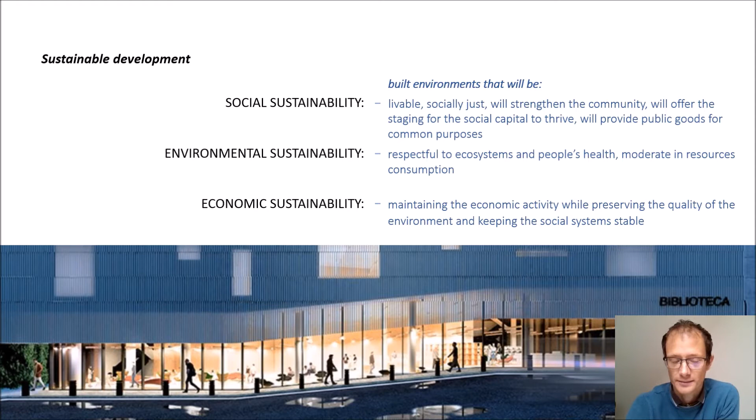What does sustainable development mean in more concrete terms in the field of architecture and urban planning? At the level of architecture, lots of very concrete standards have been developed so far that try to adjust this theoretical model of sustainable development to concrete buildings. And this relates to very different topics, which are illustrated here by showing one of these standards, which is called the LEED standard.

The LEED standard actually strives for green building design, construction, operations, and performance. So it's not only related to the final result in terms of the building in its physical appearance, but also in its functioning, so how it will use the resources and how it will perform for the users, which are more intangible dimensions, but very important to achieve green buildings in the end.

As we can see here, many different aspects are important, starting with the location. How do we choose the location for the concrete building or architecture? Because this will also have very strong environmental consequences. One of them is the transportation and the energy consumption and the environmental pollution related to it. So this is, let's say, the first criterion used by this standard.

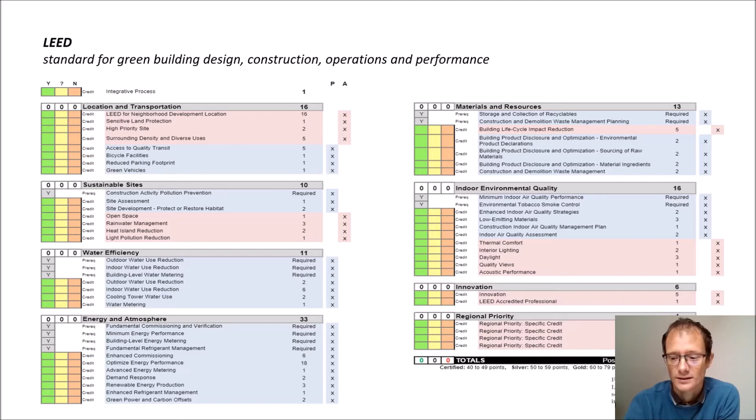Those who know Ljubljana will know that Ljubljana is a radiocentric city, so it has a very distinctively positioned city center. And then from the city center or to the city center, the main access roads run from different directions. And then along these different access roads, you would have, in theory at least, higher densities, so the morphological patterns are denser, while towards the hinterlands of these main access roads, the density would somehow decrease.

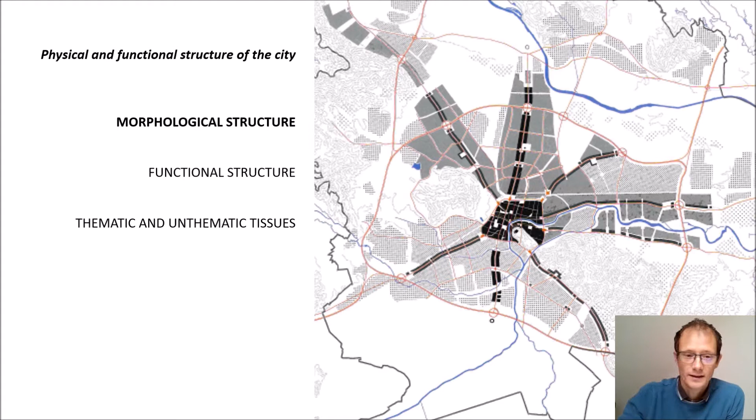What's very important within this morphological structure, of course, is not only the morphological tissue, but also the connections that would be connecting different parts of the city. And at the same time, it's not just the function of connecting, they also serve as the main network of perceiving the city. Why is this important within the discussion we will have later on? Because along these main access roads and the main connectors within the morphological structure, usually also the main public buildings would be positioned. However, the physical or the morphological structure is not the only important aspect to be taken into account when we are trying to understand the role of the positioning of the public institutions within the city territory.

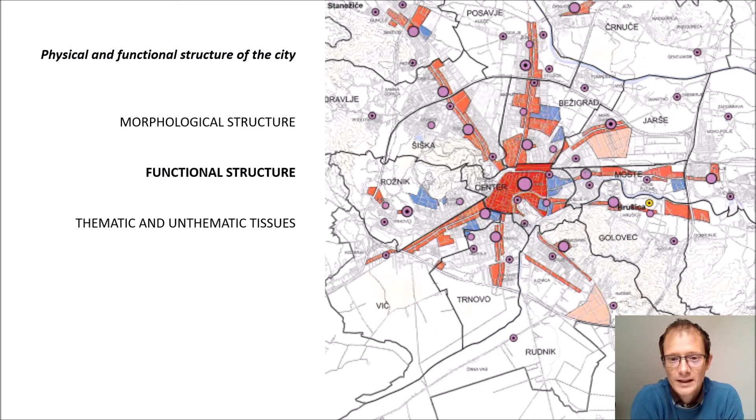These are the so-called local centers on the example of Ljubljana. As we can see, they are of different levels. Some of them are more important, some of them are less important. But it's important to note that they are kind of the centers of the activities in different parts of the city. And again, these are also the places where we would usually place the public buildings of the type of the public libraries as well.

While the unthematic tissues are the tissues that are standing out. So they are kind of out of the box, so to say. They are very unique in their appearance, but also in their functions. And again, it's very important how we actually distribute these thematic and unthematic tissues around the city.

Some of them, of course, are predefined by the historical development of the city, while the new ones are newly constructed by the urban planning procedures. And by saying this, it's also important to understand that, for example, when we are trying to find the appropriate place for the new local library, besides taking into account the morphological structure of the city and the functional structure of the city, it's also very important to understand the unthematic level of the city. Because the public library, by its prominence in the appearance and also the function, is by definition part of the unthematic tissue of the city.

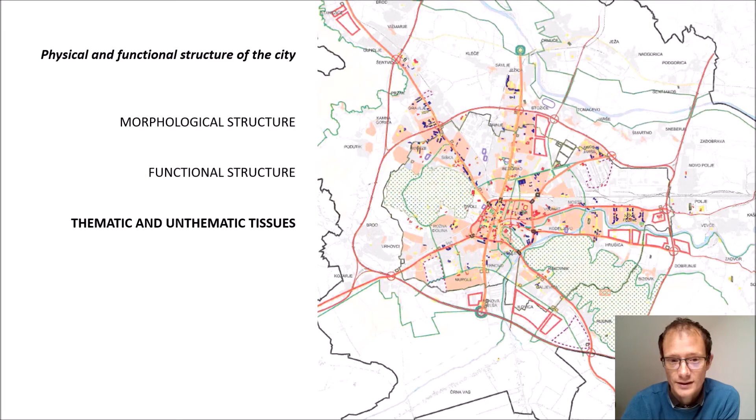So this was some very basic background in terms of the architectural and urban planning issues that we are trying to address within the urban planning. And now we come to the core topic. I'm running a bit late with my timing, but I will keep it short from here on.

Then there is a very important environmental dimension. For example, when we are trying to refurbish or build a new public library, it's very important to promote these nature-based solutions for the design of the buildings, because this is how we are also teaching the users of the city how the future of the city should be designed and how the architecture should be done to be less environmentally problematic. The public libraries are also the promotions of the technological advancements.

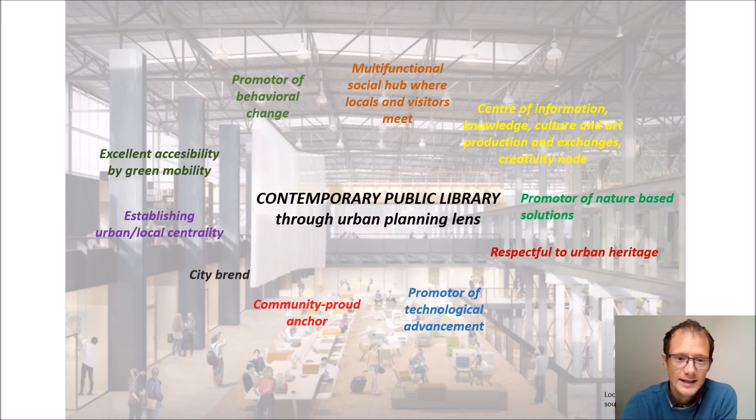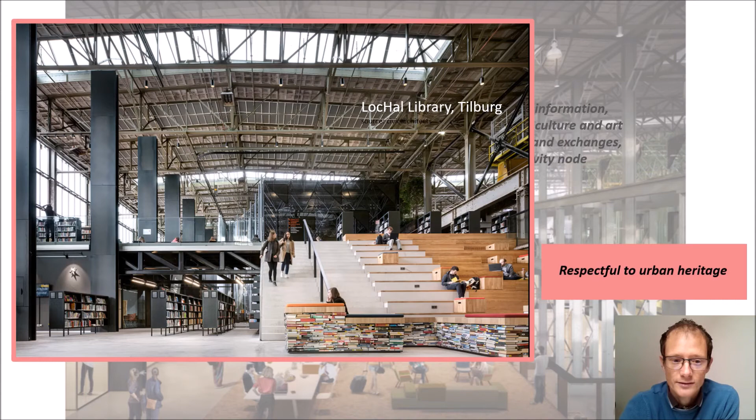Let's now really fly across some examples around the world. This is just the topic that I was mentioning. A good example from Tilburg, where they have established a combined local library, but also the local community center in one of the ex-industrial buildings. And this has become a very important local hub, even more so because it's very well related and integrated into the city's transportation network. A very good example to see if you will have the opportunity.

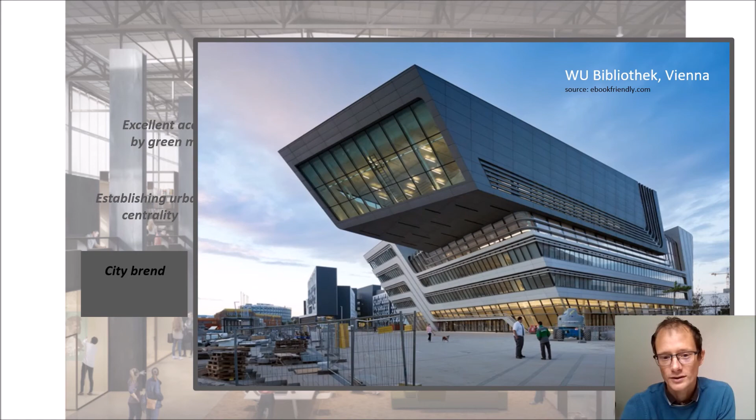And the wise cities take this advantage into account and really design public buildings, also public libraries, in a distinctive way, and then use it as part of the city branding, which is very important to boost the economic activity of the city. As I already mentioned, the public buildings, including the public libraries, are a very good anchor or starting point to make people change their behaviors.

Nowadays, I think we cannot think of public building accessibility anymore by private motorized traffic, which is still the case in Slovenia, unfortunately. But we really have to kind of softly force the users to come there by green mobility.

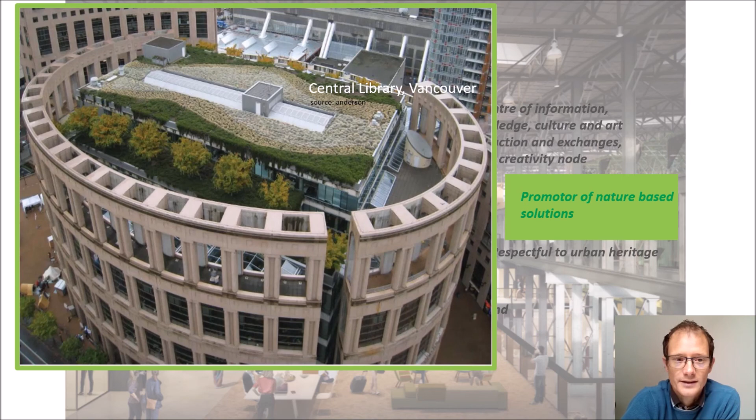Another example of this case from Vancouver, with the central library in the city. And as you can see, even if the library is positioned quite centrally and there is not much space to do something around the library, they tried to use the roof as a kind of nature-based solutions laboratory, and they're trying to really promote this green dimension to the architecture.

Last but not least, the public institutions and also public libraries are kind of a chance to set up new local nodes, the centrality within the city. I mentioned at the beginning that we have the problem here in Ljubljana because we don't have very well developed local centers. And by providing such public programs, also reading in the public space, we can really establish the new nodes of the local communities. I'm also showing this example to make us aware that the public library does not have to be a big institution, a big building in itself. It can be a very small intervention in physical terms, but it can really have a very big impact on the local life.

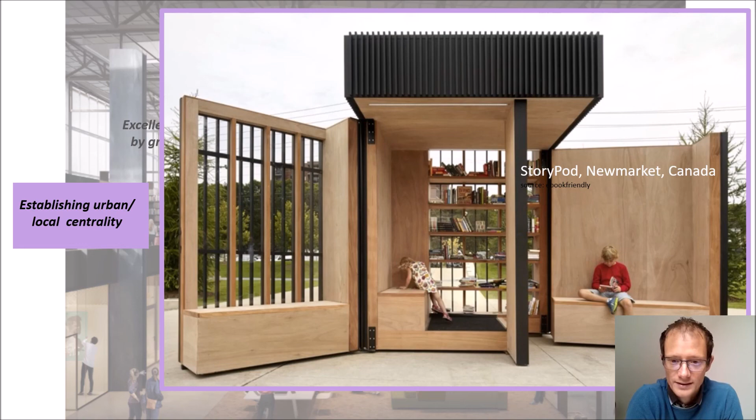At the very end, I would like to stress another important thing which I think has to be put light on, and this is how we are achieving good public buildings and also good public libraries. I cannot imagine coming to good solutions without very interdisciplinary approaches. In the case of establishing public libraries, this will by definition include the librarians, the architects, the urban planners, so everybody who is really trying to establish this function in the city. And I'm mentioning just some of the professions. Of course, the interdisciplinary approach will take into the team many other professions as well, and they will do this job in collaboration from the very beginning.

So it should not happen that the librarians would work on their own stuff in terms of defining which functions the library should have, what the capacities should be, and then the urban planners would only say, okay, we have the location there, let's do it there. But they should really start thinking together from the beginning what the new library can mean for the city or for the local community or for just one neighborhood and so on. This really should be an interdisciplinary endeavor.

And maybe even more importantly, because it's a public building, we have to take into account the opinions of the users of the space, the end users, which is of course the general public. Again, this should happen at an early stage. The future users, so the local community or the city residents, should be taken into the processes at the beginning. So the earlier, the better.